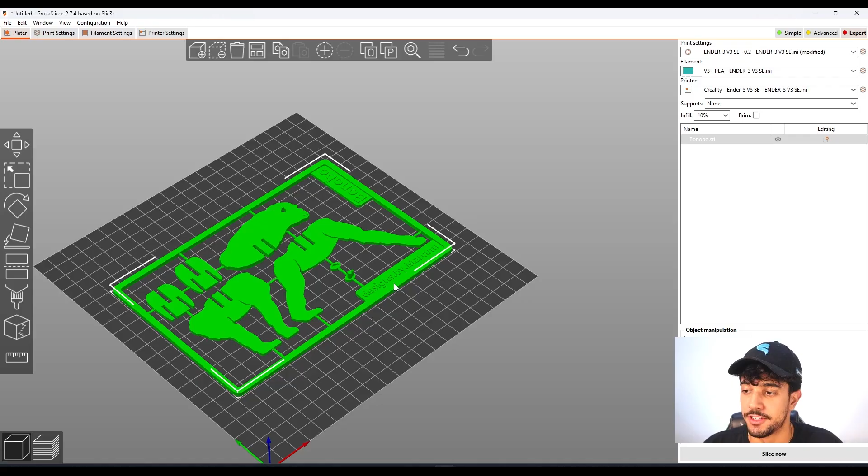In today's how to slice video, we're gonna be checking out an awesome kit card, the Bonobo Kit Card. As you can see, this is a really nice model. You just print this kit card, cut the ends, and after you assemble it, you've got a beautiful assembled model. So in this video, we're gonna be checking out the best print settings to print this.

So let's go. In layer height, we're gonna be printing this model at 0.16 millimeters. This way we're reducing the layer height a little bit. We're gonna have more layers to print, but we're gonna have a finer and better quality. So this is all worth it.

On vertical shells, we're gonna be leaving it at 3 just so we can get a really rigid model. Going over to infill, we're gonna be increasing to 10% infill just so we can get a dense model, so it's really rigid and it's not gonna break. On fill pattern, we're gonna be leaving it at gyroid infill pattern, which is quite nice.

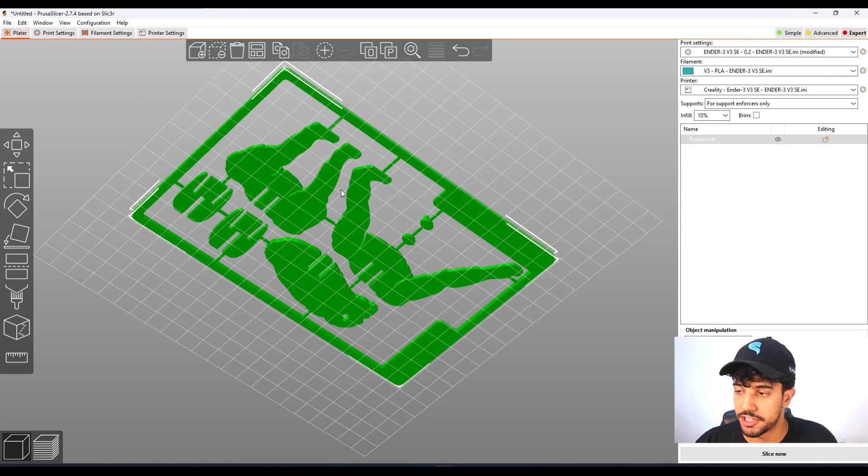Going over to brim, let's analyze if this model really needs brim. Brim is a really nice feature to increase the surface of contact to the build plate, and as you can see, we've got a solid surface of contact to the build plate.

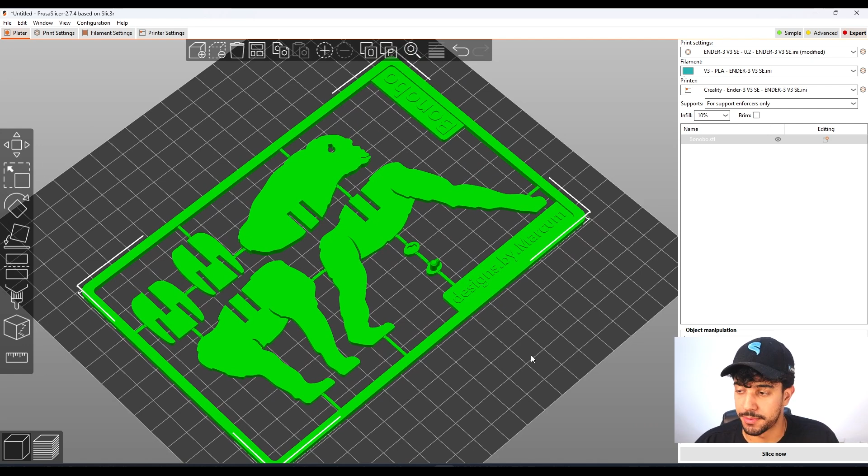But if you have some bad adhesion issues, I do recommend always cleaning your build plate with some isopropyl alcohol or detergent just to remove all the dust and oils from your fingers that are on the build plate, because that impacts adhesion a lot.

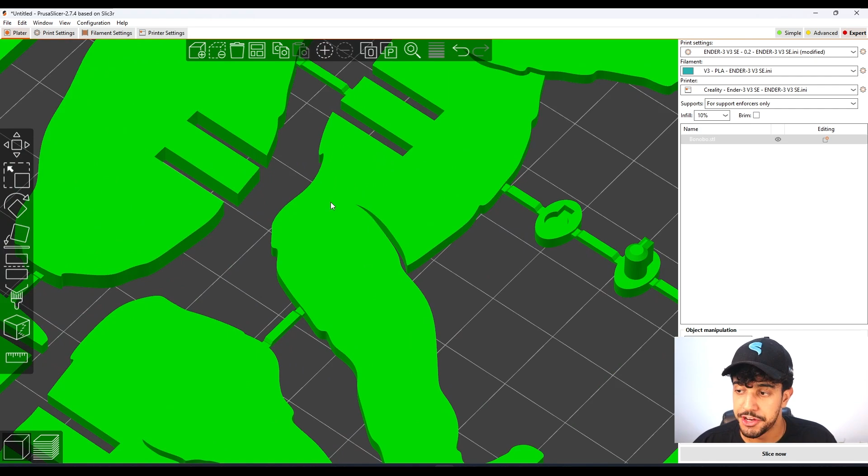Always make sure that your printer is really well leveled, so you're gonna have a good first layer and your prints are not gonna unstick from the build plate. Another thing that helps, having a leveled printer, is that your top surface is gonna come out really clean. If you have a messed up top surface, it's usually due to leveling or flow.

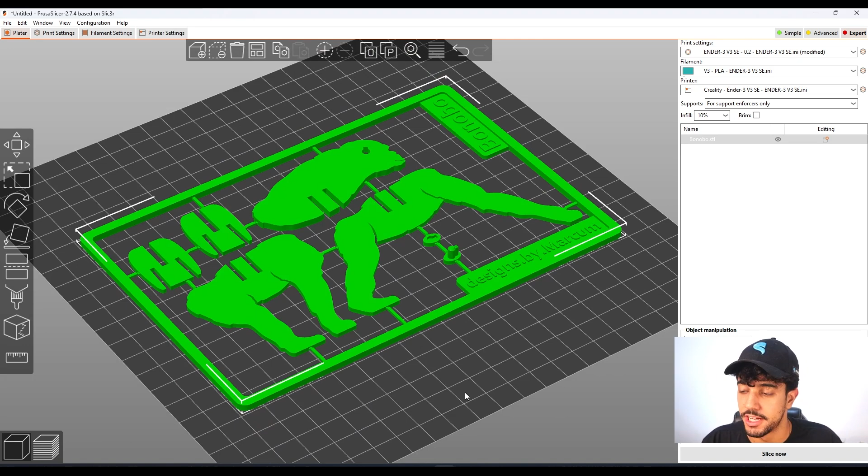So take a look if your models are turning out really nicely. Then check your flow or if your printer is really well leveled.

So let's go back to the print settings. On brim, we're not going to be adding any brim, neither support material, because this model is optimized for printing and does not need any support material.

Going over to speed, you can print this model at the standard print speed, especially for Bambu Lab printers. But I do recommend always lowering the speed a bit to get a good first layer. So on 20 millimeters a second, reduce this value, because the first layer is the most important layer.

All of the other layers are going to go on top of this one, so make sure you've got a good first layer. For Prusa, the default value for the Ender 3 V3 SE is 30, but I set it to 20 just to get a really slow first layer for a really clean result.

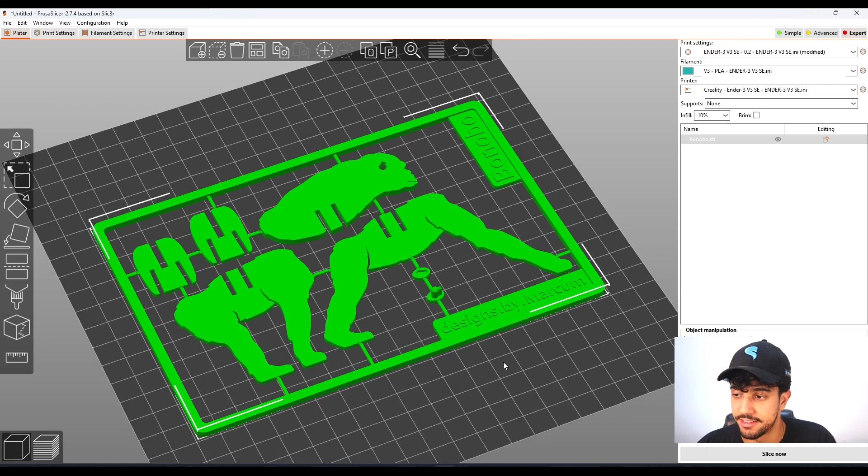And if you want, you can change the speed, it's going to vary according to your printer. If it's a CoreXY axis or a Bambu Lab, it's going to depend, but with your standard print settings you can print this model quite nicely because it's not too tall, so you won't have any problems with it.

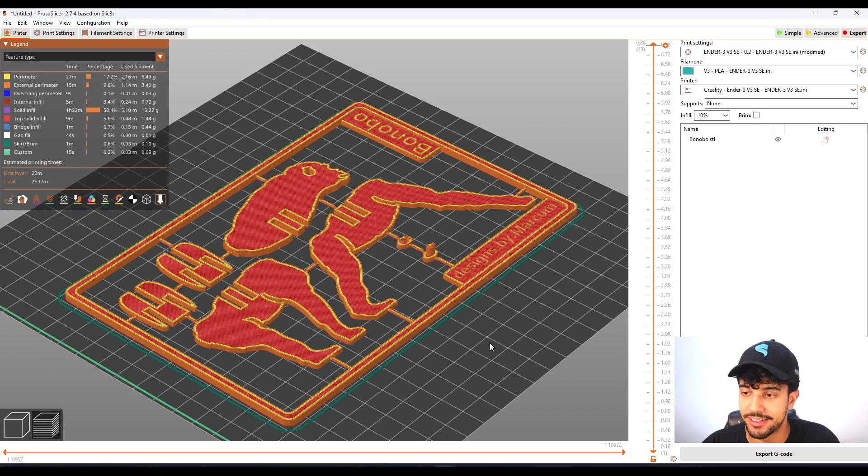So now let's just slice this model. As you can see, I just sliced it and it's gonna take 2 hours and 37 minutes. It looks quite nice. If you go to speed, you'll see that it reduces a little bit on small perimeters, but it's not going to affect this model too much.

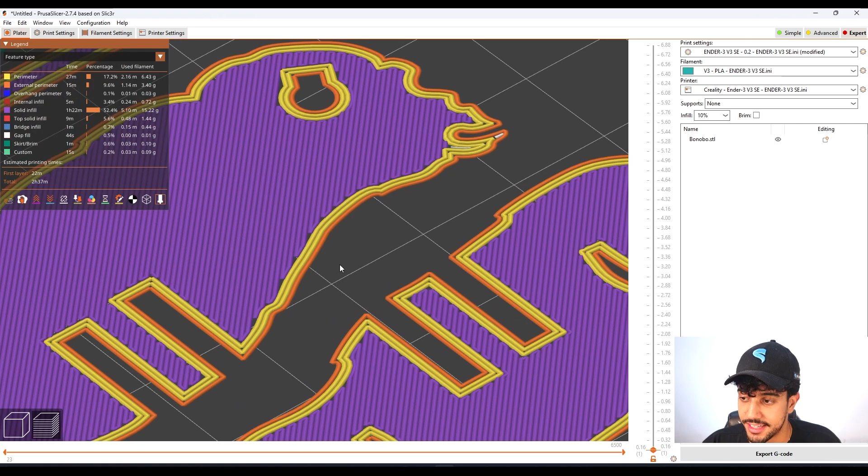On the connections, they are a bridge. If you take a look, it's printing with a bridge, not having any contact with the build plate, so it's easier to remove and your printer can print this just fine. You should not worry about this bridge.

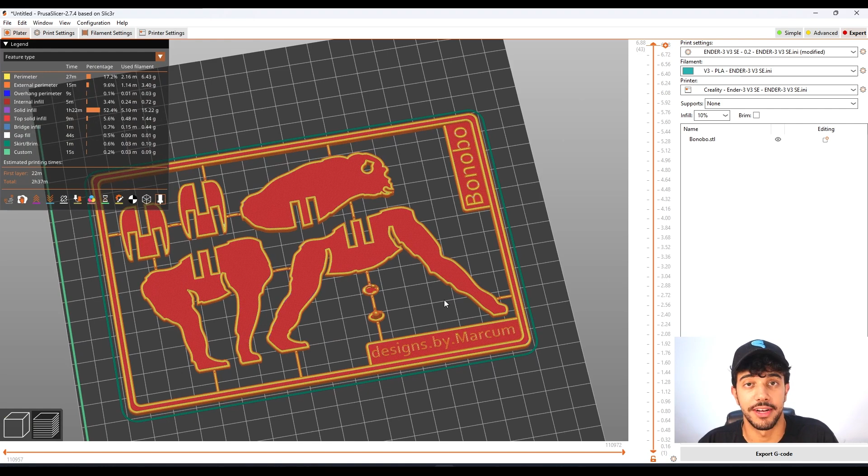So it's ready to print. Make sure you grab a really nice filament that you have laying around and print this model. So the models are ready to print.